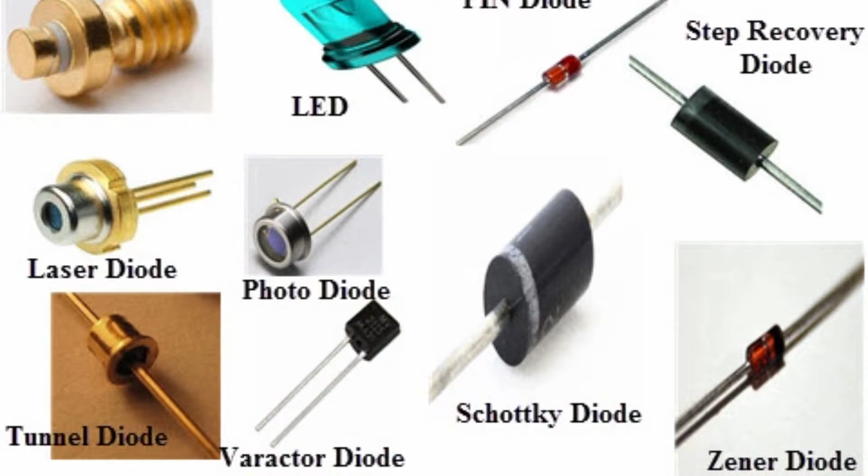Where two differently doped regions exist in the same crystal, a semiconductor junction is created. The behavior of charge carriers, which include electrons, ions and electron holes at these junctions, is the basis of diodes, transistors and all modern electronics.

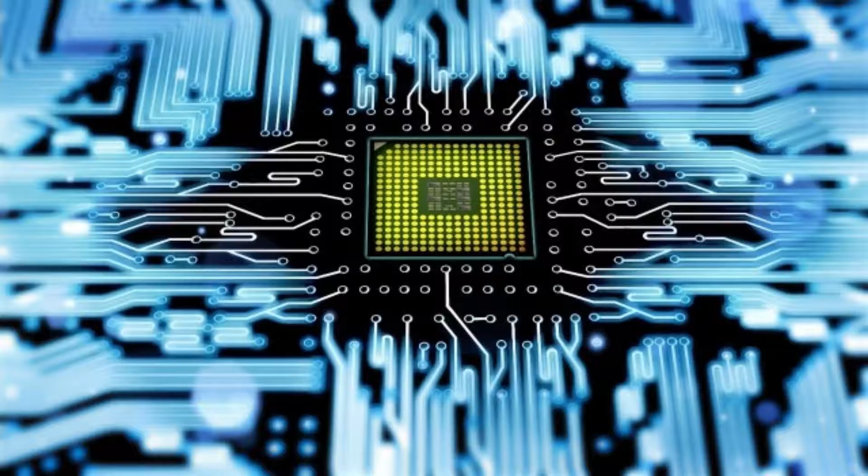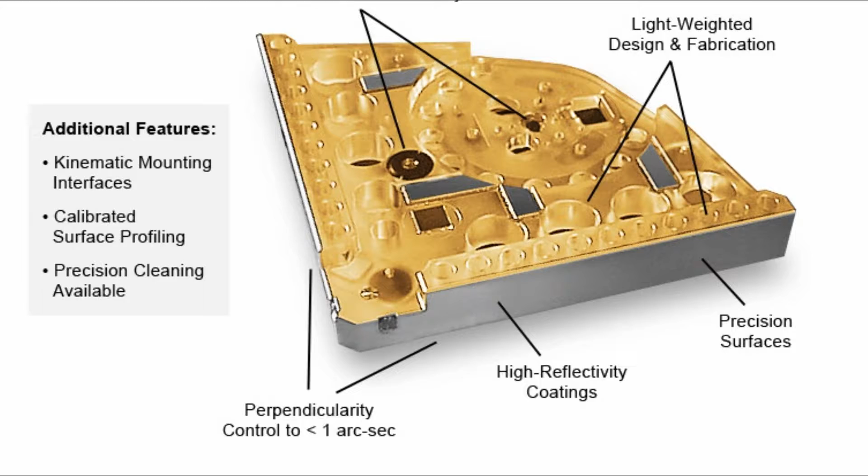Some examples of semiconductors are silicon, germanium, and gallium arsenide. After silicon, gallium arsenide is the second most common semiconductor, used in laser diodes, solar cells, microwave frequency integrated circuits, and others. Silicon is a critical element for fabricating most electronic circuits.

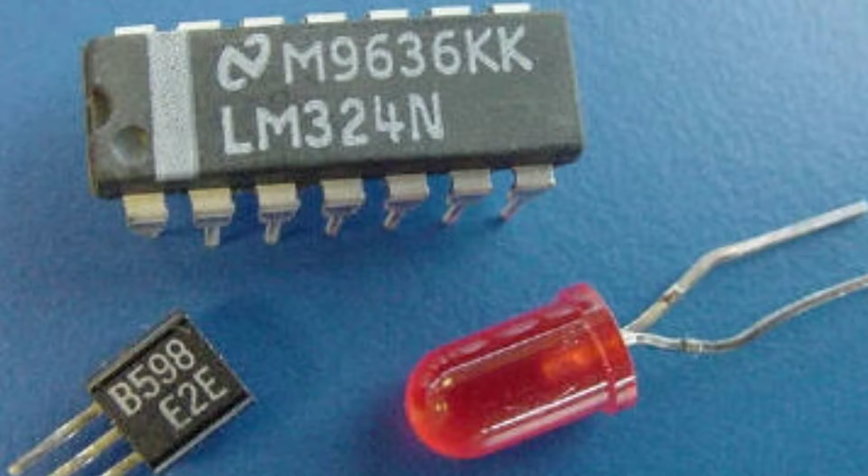Semiconductor devices can display a range of useful properties, such as passing current more easily in one direction than the other, showing variable resistance, and sensitivity to light or heat. Because the electrical properties of a semiconductor material can be modified by doping, or by the application of electrical fields or light, devices made from semiconductors can be used for amplification, switching, and energy conversion.

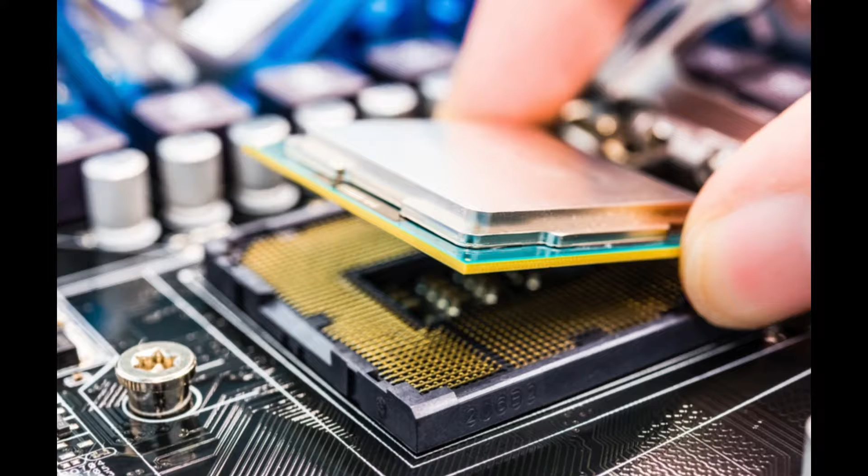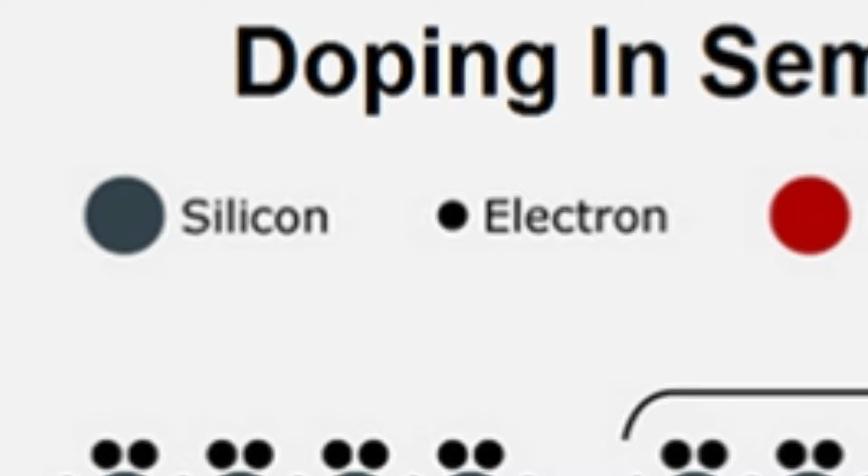Important semiconductor material properties. First one is variable conductivity. Semiconductors in their natural state are poor conductors because a current requires the flow of electrons, and semiconductors have their valence bands filled, preventing the entire flow of new electrons. There are several developed techniques that allow semiconducting materials to behave like conducting materials, such as doping or gating.

These modifications have two outcomes, N-type and P-type. These refer to the excess or shortage of electrons, respectively. An unbalanced number of electrons would cause a current to flow through the material.

The second one is heterojunctions. Heterojunctions occur when two differently doped semiconducting materials are joined together. For example, a configuration could consist of p-doped and n-doped germanium. This results in an exchange of electrons and holes between the differently doped semiconducting materials.

The n-doped germanium would have an excess of electrons, and the p-doped germanium would have an excess of holes. The transfer occurs until equilibrium is reached by a process called recombination, which causes the migrating electrons from the n-type to come in contact with the migrating holes from the p-type. A product of this process is charged ions, which result in an electric field.

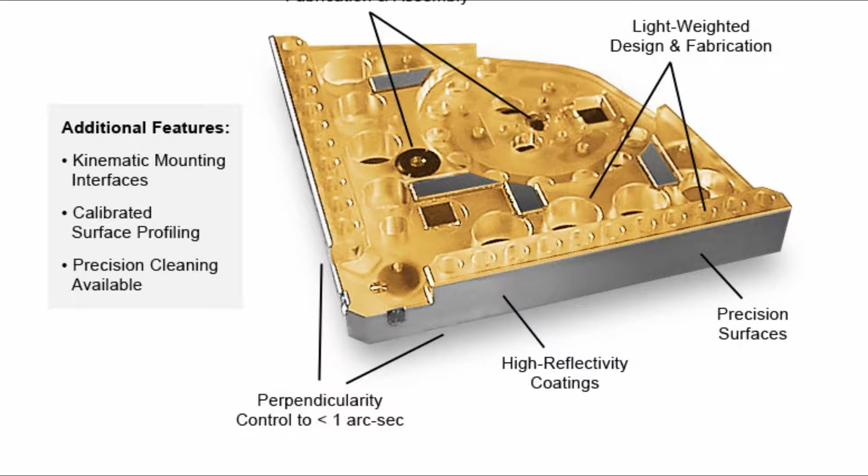The third is excited electrons. A difference in electric potential on a semiconducting material would cause it to leave thermal equilibrium and create a non-equilibrium situation. This introduces electrons and holes to the system, which interact via a process called ambipolar diffusion.

Whenever thermal equilibrium is disturbed in a semiconducting material, the number of holes and electrons changes. Such disruptions can occur as a result of a temperature difference or photons, which can enter the system and create electrons and holes. The process that creates and annihilates electrons and holes are called generation and recombination.

The fourth one is light emission. In certain semiconductors, excited electrons can relax by emitting light instead of producing heat. These semiconductors are used in the construction of light-emitting diodes and fluorescent quantum dots.

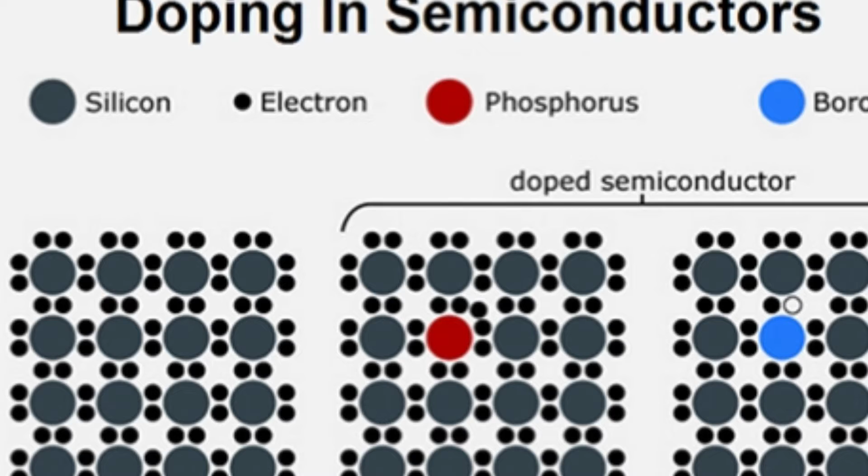After this comes physics of semiconductors, which is really important to know. Semiconductors are defined by their unique electric conductive behavior, somewhere between that of a conductor and an insulator. The differences between these materials can be understood in terms of the quantum states for electrons, each of which may contain 0 or 1 electron. These states are associated with the electronic band structure of the material.

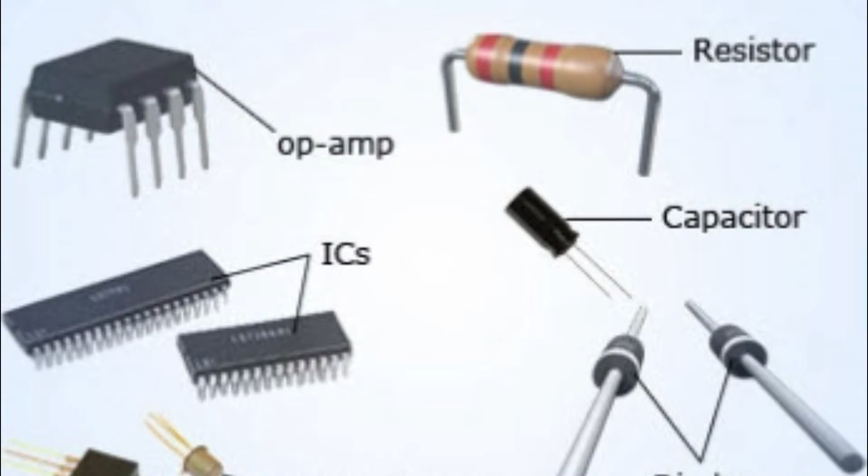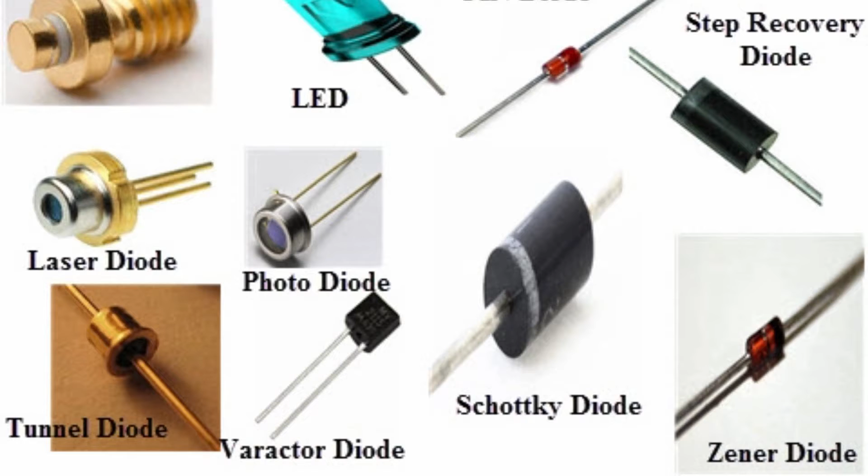Electrical conductivity arises due to the presence of electrons in states that are delocalized. However, in order to transport electrons, a state must be partially filled, containing an electron only part of the time. If the state is always occupied with an electron, then it is inert, blocking the passage of other electrons via that state. The energies of these quantum states are critical, since a state is partially filled only if its energy is near the Fermi level.

High conductivity in a material comes from it having many partially filled states and much state delocalization. Metals are good electrical conductors and have many partially filled states with energies near their Fermi level. Insulators, by contrast, have few partially filled states. Their Fermi levels sit within band gaps with few energy states to occupy.

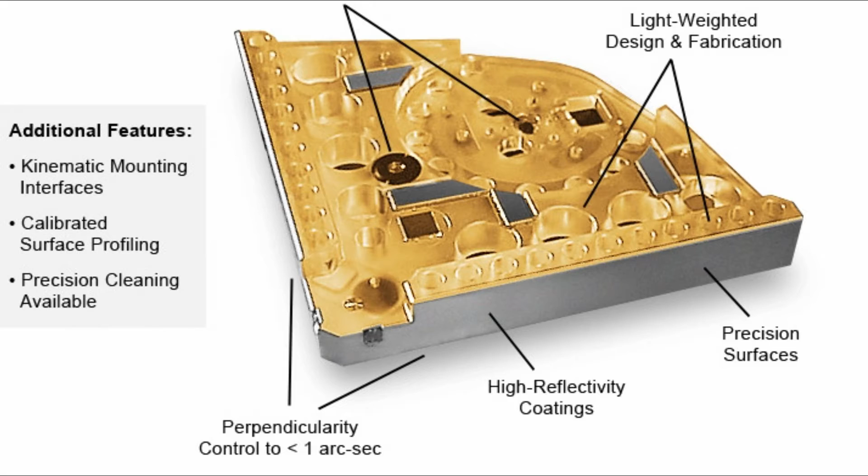Importantly, an insulator can be made to conduct by increasing its temperature. Heating provides energy to promote some electrons across the band gap, inducing partially filled states in both the band of states beneath the band gap and the band of states above the band gap. A semiconductor has a band gap that is smaller than that of an insulator, and at room temperature, significant numbers of electrons can be excited to cross the band gap.